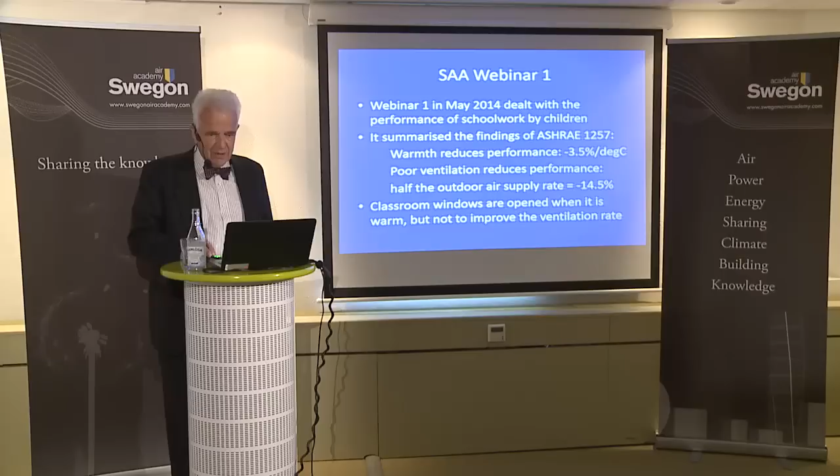Webinar 2 was held in November last year. It's showing 1 here. Yes, sorry. Okay. So this is summarizing what I said about Webinar 1. Sorry about that. I'm looking at the wrong screen here. Webinar 2, I'd better do what I usually do and turn and face the screen.

In November 2014, it dealt with thermal and air quality effects on office work, that is, adults trying to work under different conditions. The work rate was 8% lower at 27 degrees, when they thought it was only slightly warm, versus 20 degrees when they thought it was cool, if they were clothed for 25.

We showed that bioeffluents and emissions reduce work rate, in other words, air quality, and that when the humidity is below 20%, as it often is in these latitudes in Stockholm when it's winter outside, this affects the eyes, makes them feel dry, makes you blink more often, and therefore also reduces work rate very considerably.

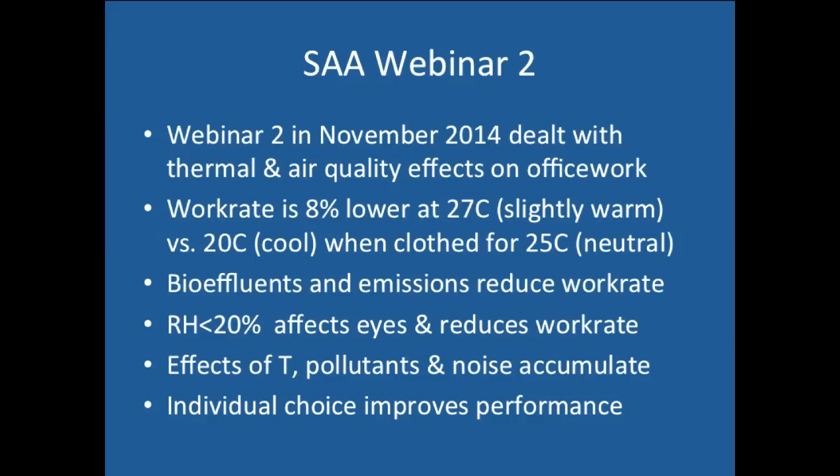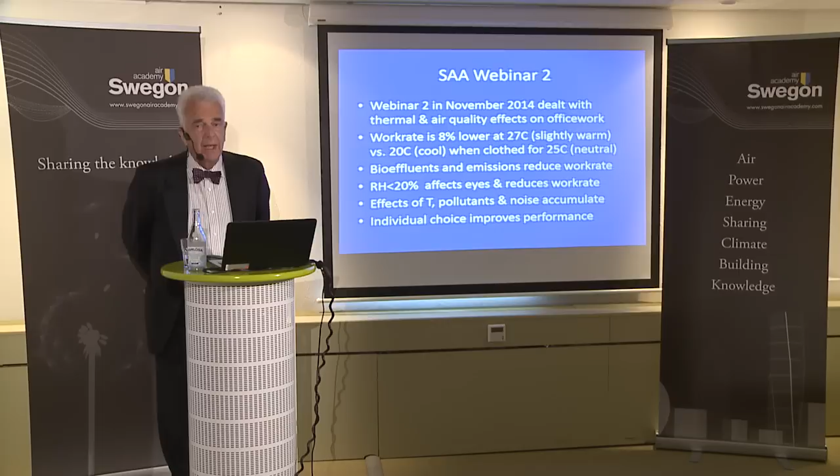We showed in another experiment that the effects of temperature, pollutants and noise can add up, not exactly, but they do accumulate. They're not additive in the sense that if you have the same effect of temperature and pollutants, you can add them together, but they will be greater if you add the second stressor. And we also showed that individual choice about some aspect of the environment can improve performance.

Well, today, in webinar 3, I'm going to tell you about 11 other experiments that I performed over the years on how other factors affect our performance. I'm very fortunate to have had the chance to study factors which you wouldn't think were part of the everyday life of an indoor climate researcher, but people saw that I could show the effects of small changes in temperature and air quality, and they asked me if I couldn't study other aspects of the daily environment.

So Swegon thought it might be interesting to make you aware of those experiments too. We have recently shown for the first time that bedroom ventilation rate affects sleep quality, and that as a result of the poor sleep, it affects next day performance. That starts being interesting for our everyday habits.

I showed over a course of many years, both with Swedish and Chinese children, that breakfast affects performance during the course of the morning, and in a big experiment that lunch affects afternoon performance.

And then during the years I was a consultant to the Volvo Car Corporation, I got the chance to do an experiment on active safety rather than passive. Instead of protecting people from the results of a mistake, failing to see something in front of them, and improving the car's ability to protect you in those last milliseconds, I persuaded Volvo that we should actually improve the vehicle climate, the cabin climate in the vehicle, to improve driver vigilance so they wouldn't make those mistakes.

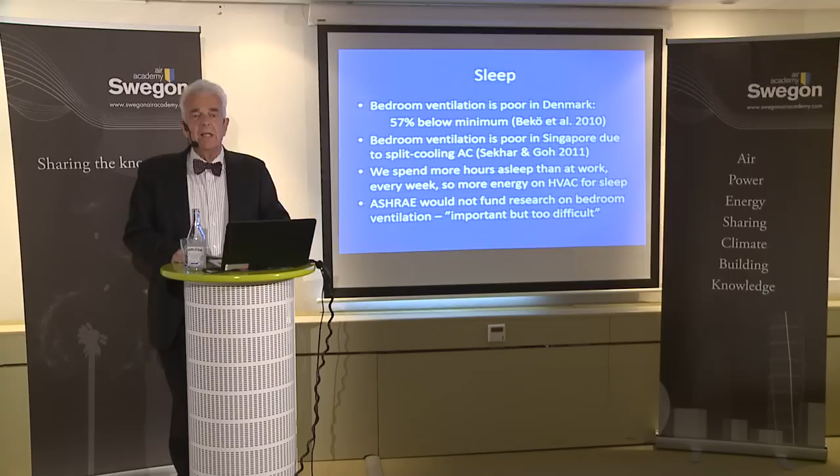I think we should study real sleep in people's own beds and under normal conditions, and that's what I wanted to do. ASHRAE said it's too complicated. There are too many things that affect sleep. Well, that's true. But sleep is a behavior, just as work is a behavior, and I know how to study behavior and how the outdoor environment or the indoor environment affects behavior. And we have methods that have been developed for looking at the side effects of medication, which allow us to do this important work.

In Denmark, we managed to get a modest grant for my colleague Peter Strøm-Tejsen to do a postdoctoral study on sleep to show that it was possible. Unfortunately, the money wasn't sufficient to do a sufficiently large experiment, and I didn't expect it to succeed in showing actually statistically significant results. But the good news is that it did.

In 2 field intervention experiments on bedroom ventilation, we studied sleep and next day performance. Sleep was recorded using actimeters that can distinguish sleep from waking. An actimeter is about this size. It's like a wristwatch. It records every movement of the body. And over a period of 3 weeks, you can then hitch it up to a computer and using validated software, find out at what point and for how long that person was asleep. In other words, not moving.

And if people are even only slightly awake, they move because they're aware of discomfort here or there, or they get a bit stiff where they're lying in bed. So we can actually quite reliably distinguish between sleeping and waking state. We can't, of course, look at sleep stages, but the distinction between sleeping and waking is important for seeing what is preventing you from sleeping.

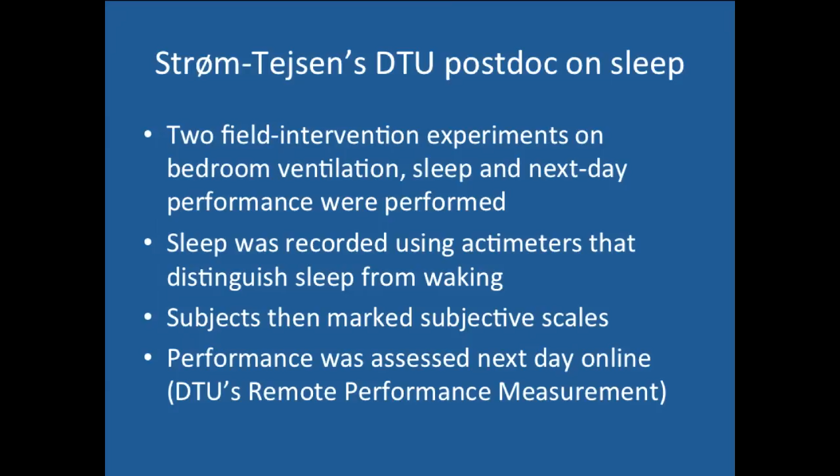And we were able to assess performance for these subjects next day using our RPM software, Remote Performance Measurement, which we developed at the International Centre for Indoor Environment and Energy, where almost all of our tests that we used to use paper and pencil for are now online. And we can measure both speed and errors on a whole range of different tasks, normal everyday tasks like typing or adding things up or multiplying them or reading or proofreading or finding errors in a text or checking columns of numbers.

All that can be done automatically, and what's more important, it can be assessed automatically so that each week of experiment doesn't generate a year of analysis. The results are available instantly.

So using these 2 quite recently developed methods, sleep studies using actimeters and RPM for performance, sleep experiment 1 was performed on 7 male and 7 female subjects over a period of 2 weeks in 14 identical student rooms, each of them single occupancy rooms. Each student was sleeping in an identical student room with the same furnishings and so on, and in their own bed. They were used to sleeping there. They were not in a sleep laboratory. They didn't have any electrodes in their heads, and we weren't taking blood.

The intervention was to open the window on one week and close it for the other, of course in balanced order. Half of them met open window first and half of them met closed window first, in our usual way for intervention experiments. A heater thermostat kept the room temperature at the setting preferred by each subject. So we weren't asking them to put up with a very cold room just because we wanted them to open the window. They chose temperatures in the range 16 to 28. There's a surprisingly large difference in what temperature people prefer to sleep at. So I wouldn't, at this stage, claim to know what is the best sleeping temperature, but of course we could do the experiments to find out.

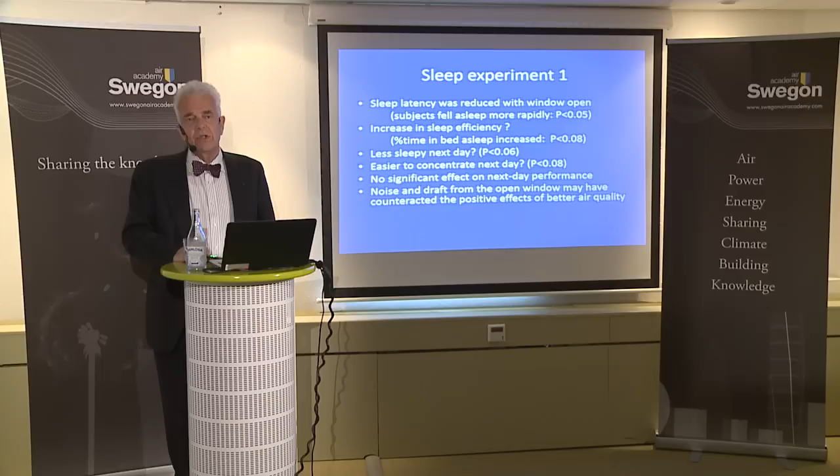Sleep latency, the time it took these students to fall asleep, was reduced with the window open. Subjects fell asleep more rapidly, and this was a statistically significant effect, even on such a small, diverse group of different gender and different background, and just 7 people of each gender. So I was actually amazed that we could show this effect.

Sleep efficiency tended to be increased, but we couldn't show that was statistically significant. The p-value, the probability that this observation could have occurred by chance, was 0.08, and so that's not formally significant. But taken together with the second experiment, we know that it was a real effect.

We asked them, of course, how they felt the next day, and with the window open, they felt less sleepy next day, p-value 0.06. They found it easier to concentrate next day, p-value 0.08. Neither of those are formally significant, but they are a strong indication that that's what was happening.

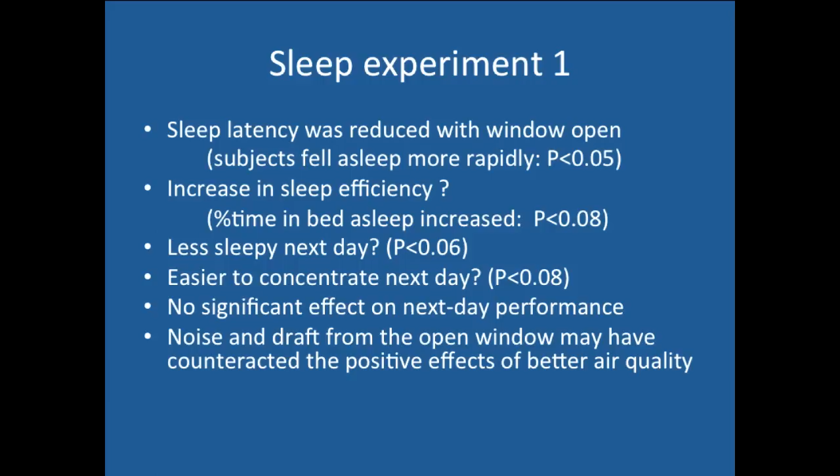We could not show an effect on next day performance in this experiment. And I think the reason is that noise and draft from the open window may have counteracted the positive effects of better air quality. And that was the reason we did experiment number 2 in a slightly different way.

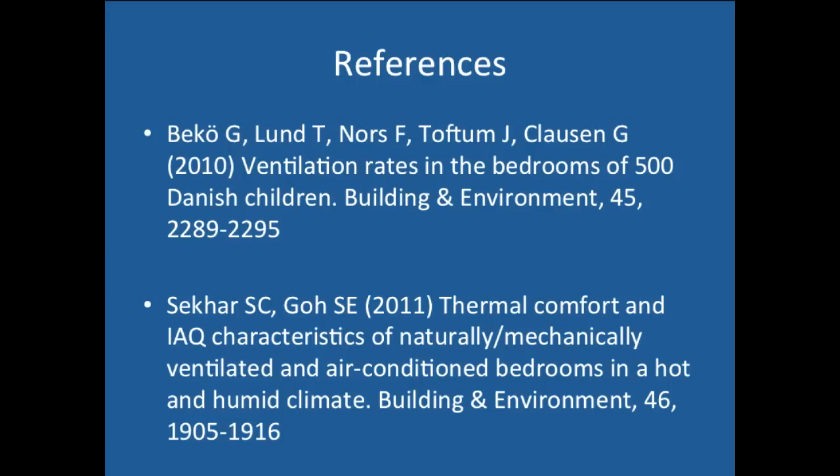This first experiment was published with this reference, and I'm not going to dwell on these reference slides because you can always go back and look at them. I've given you the references of the work documenting conditions in Danish and Singaporean bedrooms as well. So you can pick these off the slide offline by returning to this presentation at the Swegon website.

Sleep experiment 2, still with only an inadequate number of subjects, in this case 8 male and 8 female subjects, still for only 2 weeks, this time 16 identical student rooms on the same corridor, and same building anyway. There was extract ventilation in the corridor and an air inlet in the wall.

So the idea was that the air should be drawn into each room and then under the door out into the corridor. It's a very common, cheap solution, and it prevents cigarette smoke from the corridor getting into the rooms because the air is going the other way, for example. But as you'll see, it's not a particularly efficient way of ensuring good bedroom air quality. There can be short-circuiting. If somebody's door is open, then the resistance for airflow of all the rooms with closed doors will be too great for very much air to be pulled through it.

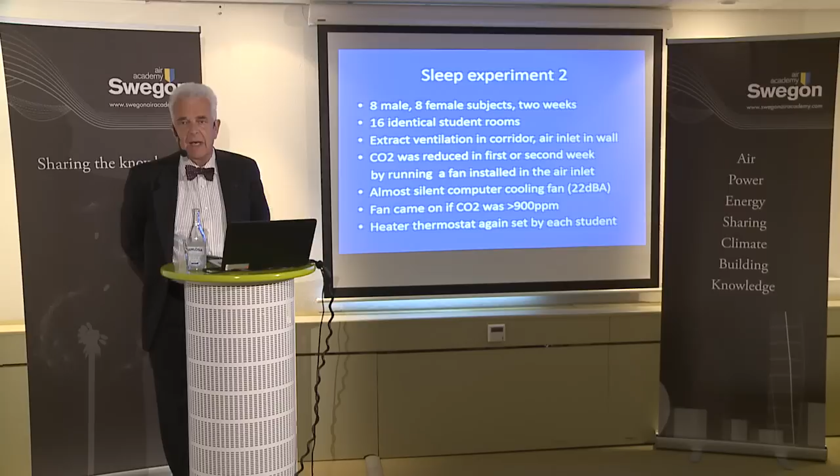We reduced the CO2 in the first or the second week, again in balanced order, by running a small fan installed in the air inlet. Peter chose an almost silent computer cooling fan, which was measured at only 22 decibels. That is not audible above normal background noise in bedrooms of 35. The fan came on if the CO2 rose above 900 ppm. Otherwise, it didn't. And the heater thermostat was again set by each student to the temperature they preferred.

The average room temperature this time was 21.9. Operating the inlet fan did not change the room temperature. There was no difference between the two conditions of air quality. The room temperatures selected this time ranged from 14 to 28, more or less as in the first experiment. And again, women selected a 3 degrees Celsius higher room temperature than men, so that seems to be fairly common. The average humidity was again 40% with the fan operating, 52% in the week with no fan. So it's highly comparable with the first experiment.

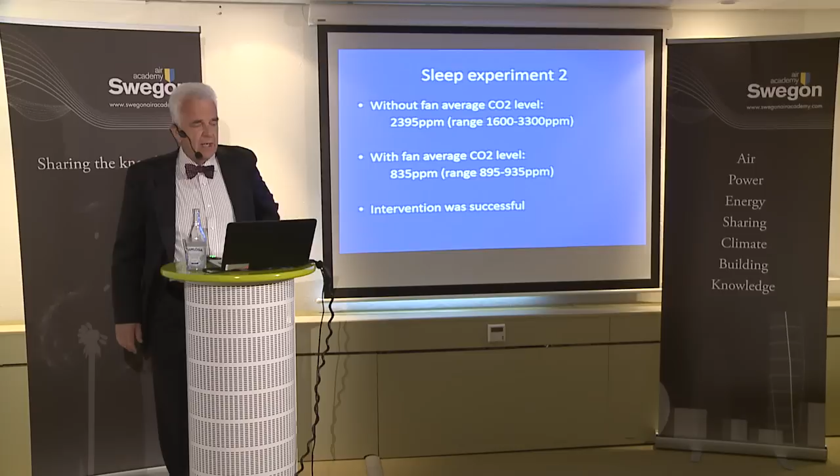Without the fan, in other words, under the normal conditions with air being pulled through the air vent by the corridor fan, the CO2 level rose during the night to 2,395 ppm, a range of 1,600 to 3,300 ppm. So poor ventilation in this student bedroom block.

And with this tiny fan operating at an absolutely negligible energy cost, the CO2 level was dropped to 835. Again, a fourfold decrease in the CO2 level. And the range was 895 to 935, so there were no peak values above 1,000 ppm, which is what is conventionally taken to be indicating poor ventilation.

In other words, again, the intervention was successful. We made the change we intended to in indoor air quality in these 16 bedrooms. The results showed that the sleep efficiency was higher this time with the fan, more time in bed asleep. This time it was formally significant. The p-value was below 0.05.

With the fan running, with the CO2 controlled, subjects reported feeling significantly better and feeling more rested. So these were significant changes in how they felt the next morning as a result of our change in ventilation. Now those three findings would in themselves motivate such a tiny investment in better bedroom ventilation, and I hope they will. But we went on to measure their performance too.

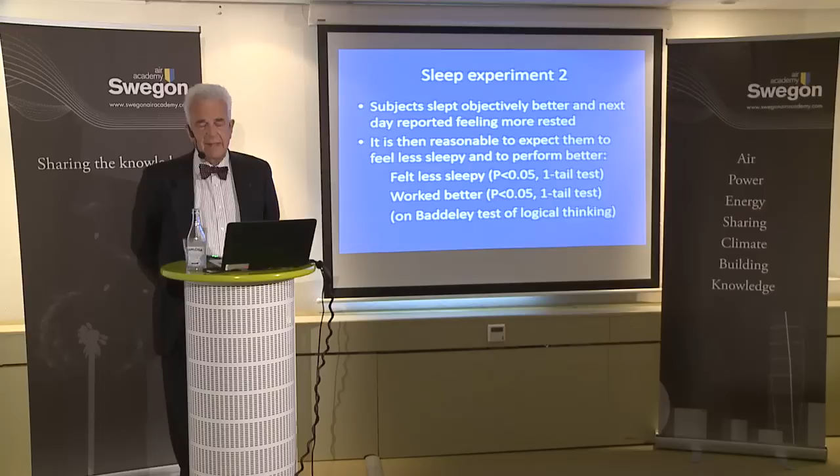The test that we used was Baddeley's test of logical thinking. It's been used a lot to show, for example, that doctors who've worked all night should not deal with patients next morning because they are not able to do as well on this test of logical thinking. So if you have a responsible job or if you really are interested in your job, you should make sure that your bedroom is properly ventilated so that you can think straight next day.

You'll also feel better. Sleep experiment 2 was communicated in Brazil last October. We haven't yet published a full scientific paper on these two experiments, but we will. I'm now going to move from sleep because, unfortunately, through no fault of mine, we're only at the start of this work. As I said, I wasn't able to get the money for doing major work on bedroom ventilation.

But I was invited to do a lot of experiments on breakfast and performance. Firstly by a dairy who wanted to presumably sell more milk products for people to eat at breakfast. Then by other food companies who wanted to get in on the act. And finally by the Kellogg Foundation, who funds this kind of work internationally.

I'm going to tell you about a whole series of experiments where I manipulated breakfast experimentally for 81 Swedish children in 4 classes of a Gävle school while I was working there at the time. Later, in 10 classes, 166 Swedish children, in 2 classes in each of 5 schools in another Swedish town called Linköping, and with my colleagues in 3 Chinese research institutes, 515 Chinese children, 12 classes, in Guangzhou, Shanghai and Beijing.

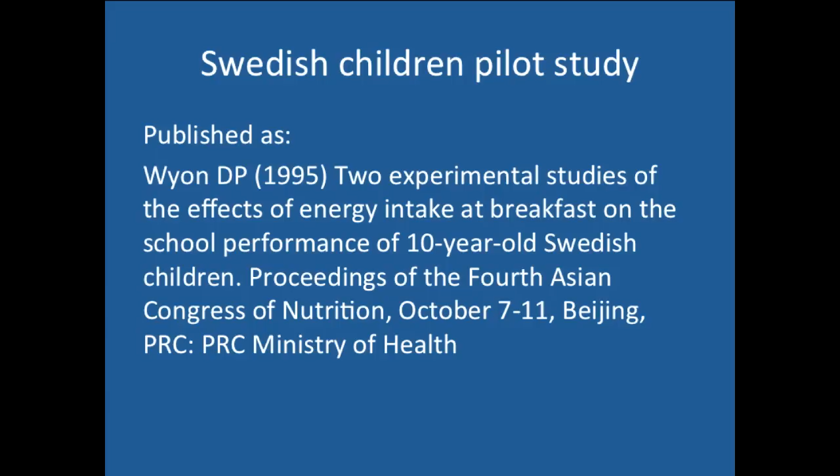And this was published, well, presented, if you like, at the Fourth Asian Congress of Nutrition, which is how I got into contact with Chinese researchers who were also asking themselves the same questions. This conference paper is probably difficult to get hold of, but it does exist. Swedish children pilot study, we call this, because the nutritional journals would not accept this study for publication, because the nutritional intake had been subjectively reported and not measured. And nutritional experts like to know exactly what they're talking about.

For me, as a behavioral researcher, the intervention was asking the parents to do one thing or the other on given days. And if there was a statistically significant difference, well, then breakfast has an effect. But they wanted to know which breakfast, how much protein, all those things that nutritional experts are paid to concern themselves with. So we had to redo the experiment.

Arla, who had paid for this first experiment, is a major dairy company in Sweden and neighboring countries, and they publicized the findings anyway. They, in fact, took the unusual step of publishing my experiment with my name and everything on their milk packages. Millions and millions of milk packages. So just about every household in Sweden got to know about the results of this experiment. And as a result, Swedish parents and children started to regard breakfast as important for schoolwork.

In fact, I got many messages from parents who said that this was a real nuisance, because one parent said, I got up early, I put out everything to be a really good breakfast and expected my 14-year-old to be delighted. And when she came down, she took a look at the table and she said, where's the apple? And that was because we were showing pictures of a good breakfast, and this happened to have an apple in it. So it did lead people to be aware of the need and the benefits of eating a good breakfast.

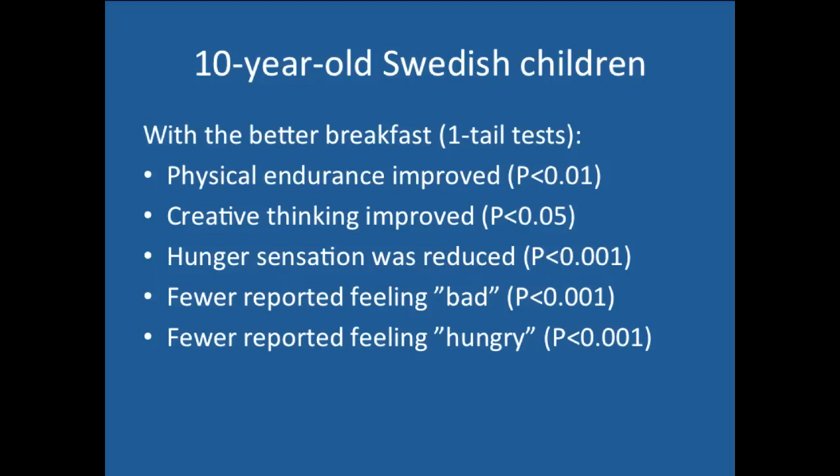With the better breakfast, again using one-tail tests, because this was our expectation, physical endurance again improved on the same test, p-value of 0.01, very highly significant effect. Creative thinking again improved, p less than 0.05. Children reported less hunger, p less than 0.001, and fewer reported feeling bad and fewer reported feeling hungry after eating the good breakfast. So that's quite a lot to get for a few pieces of breakfast cereals and milk, a few items.

As I said, we weighed the uneaten food to determine the intake. And on the day with the poor breakfast, the errors decreased the more they ate. Because even with the poor breakfast, they were all having less than 10%. The more they ate, the better they did on the addition test. So there, of course, we're on a very steep curve. And so we are getting close to predicting what would happen if they hadn't eaten any. There was a correlation between how much of the bad breakfast they ate and how well they did on the addition test. So every little helps at the low end. The idea of giving children from a deprived home a sandwich when they come to school probably has an enormous effect on their ability to do school work.

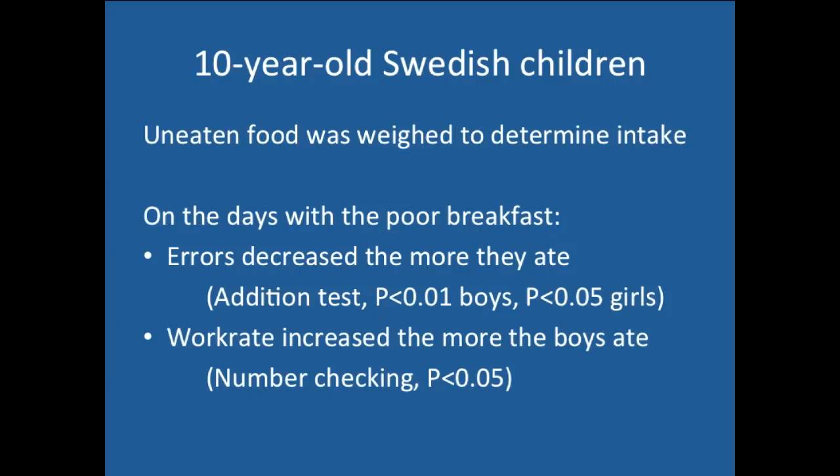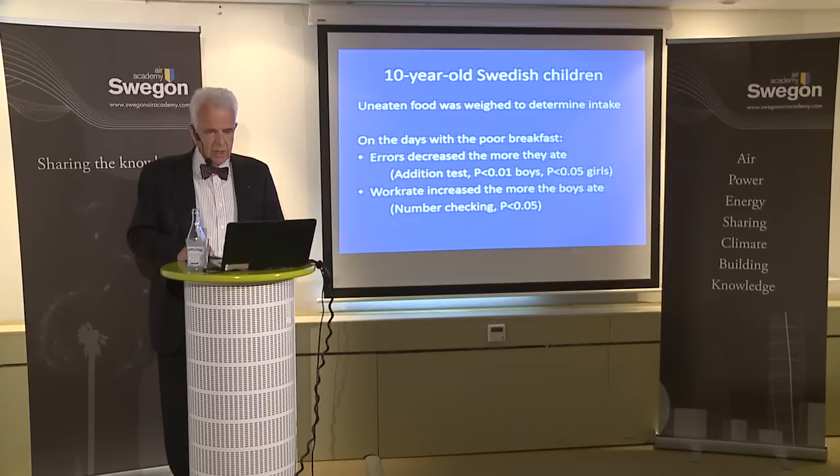The work rate increased the more the boys ate. They worked faster if they had eaten more of the bad breakfast. But remember, this is only on half of the data, because here on this slide we're talking about the days when they had had a poor breakfast. There's a lot of data in this, and I'm very pleased that these results were so significant. And this time our paper was accepted by a reputable nutritional journal, the International Journal of Food Sciences and Nutrition. So that is an archival journal, and this paper is readily available.

After my presentation of the first experiment in Beijing, I was approached by 3 research institutions in China with the help of the Kellogg Foundation that was helping them to do this kind of research. Would I advise them on how to carry out this kind of experiment? So I made a lot of trips to China to do just that. The fact is that Chinese children apparently rarely eat any breakfast. It's just not the national habit to eat much breakfast, just as it isn't in France, or wasn't. You know, the traditional croissant and a Gauloise is a poor breakfast, and Chinese children eat apparently something like that.

So we gave them breakfast A in these experiments, which was again more than 20% of recommended daily allowance, consisting of cereal, milk, bread with peanut butter, which they like, and breakfast B, less than 10%. In this case, they just got some congee, which is a rice gruel, which most of us outside of an old folks' home wouldn't like, and a steamed bun. And this provides a fair amount of calories, but still less than 10%, and almost no protein at all.

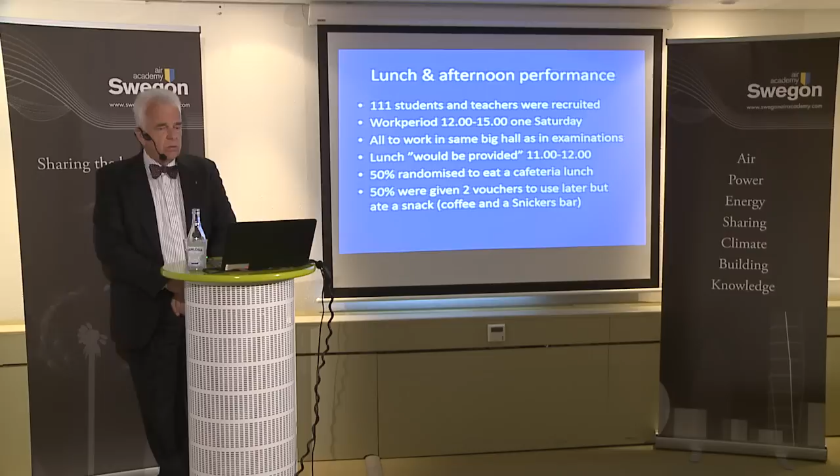But I'm afraid these results were never published. I wasn't paid to publish them, and I didn't have time. I was doing other things. But I was paid to look at the effects of lunch and afternoon performance. I recruited 111 students and teachers from a provincial high school, or shall we say technical school, in Sweden, to be at a particular venue between 11 and 12 o'clock.

This is the only time I've done an experiment all in the same day, all in the course of 4 hours. It was bang, and it was done, and Securicor was there with the money, and we paid out huge amounts to these people for being there for those 4 hours. They were all to work in the same big hall at an individual desk as in an examination. They were used to that. They were students and teachers. And we said in the recruitment literature that lunch would be provided between 11 and 12.

We randomized 50% of those turning up to eat a cafeteria lunch. And the other 50% were told that they would be receiving 2 vouchers that they could use later, all at once or on 2 different days. But today they were not to have lunch, to eat a snack, fairly substantial snack, a coffee and a Snickers bar, which is what many people think is an adequate substitute for a decent lunch.

The nutritional values of the lunch we provided were 633 kilocalories, 34 grams of protein and 15 grams of fat. It was in fact spaghetti bolognese, salad, coarse bread and medium fat milk. The snack, surprisingly to me, provided 300 kilocalories, 8 grams of protein and 13 grams of fat. We should probably have provided a cheaper kind of sweet, because this almost wrecked the experiment, because it was half as much nutrition as in the good lunch.

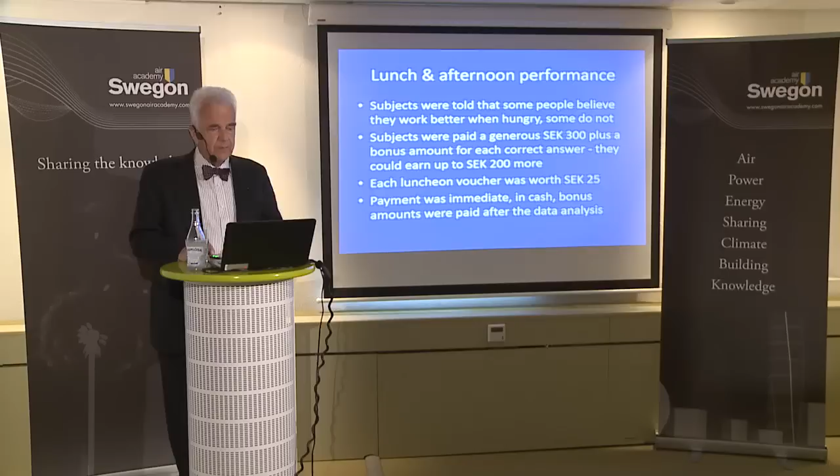So we expected there to be no effect or even a negative effect in the period immediately following lunch compared to people eating a snack. I think that's what many people think when they like to keep going and just eat lightly and try and force through the afternoon. The subjects were told that some people believe they work better when hungry and some don't, so that the level of motivation would not be too badly affected.

The subjects were paid a generous 300 Swedish crowns plus a bonus amount for each correct answer. So they could earn up to 200 crowns more, and 500 tax-free for an afternoon like that is pretty good for students. And each luncheon voucher that the ones with the snack were given was worth a further 25 Swedish crowns at that time. The payment was immediate in cash, and the bonus amounts were sent to them after the data analysis had been performed.

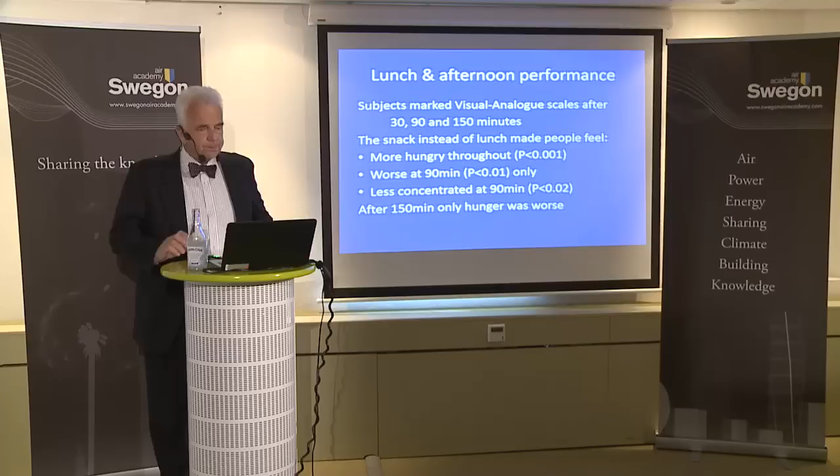Subjects marked visual analog scales after 30, 90 and 150 minutes. In other words, half an hour afterwards, a further hour and a further hour again into the afternoon work session. And the snack, as opposed to lunch, made people feel more hungry throughout. That was a significant difference. It made them feel worse at 90 minutes, but not at 30 and not at 150 minutes. And at 90 minutes, they also said that they had more difficulty concentrating. But after 150 minutes, only the hunger was worse.

It looked like this on the visual analog scales. This is a scale on the left-hand side that runs from 0 to 100. 0 corresponds to very hungry and 100 to very full. And you can see that the people who ate lunch were right up there, pretty full, 90 or something like that. And that their line trended down very slowly over the 150 minutes. Whereas those who'd eaten the snack, they started off above the halfway mark of hunger, crossed over just before the 90-minute period, and then moved down towards being very hungry during the afternoon.

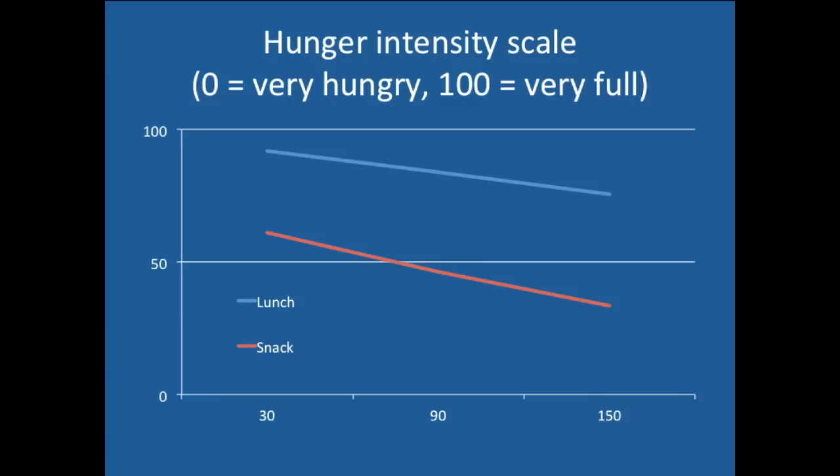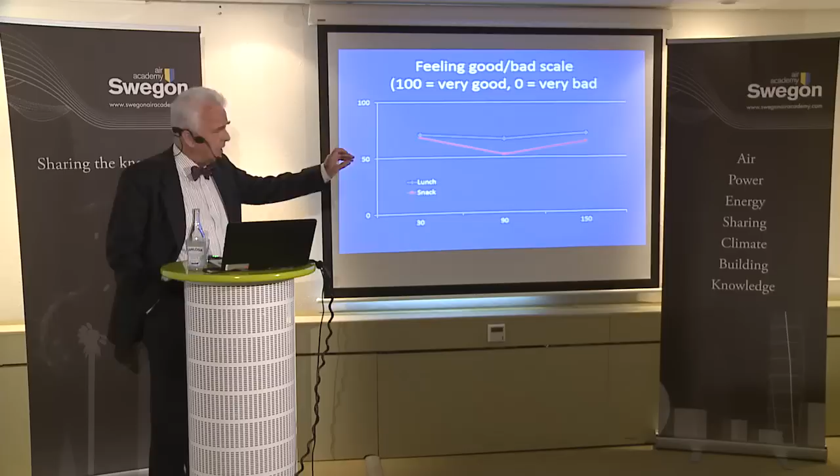So the body then mobilized reserves, and after 150 minutes, they felt just as good as if they had eaten lunch. But they still felt hungry, okay? Because on the previous scale there, they were well below the lunch group, well below down there in the hungry side. But they felt good, as you can see in the upper half of this scale. All subjects remained in the feeling good half of the scale all afternoon, though they felt worse at 90 after a snack than after lunch.

And after a snack, subjects crossed into the hungry half of the scale after 1 hour and 16 minutes. So eating a snack like that will keep you from being hungry only for 1 hour and 16 minutes. After that, it's been metabolized and you start feeling hungry again. And that's why if you persist in this behavior of eating unsuitable food, you will feel hungry much more often and end up eating many more calories and putting on weight.

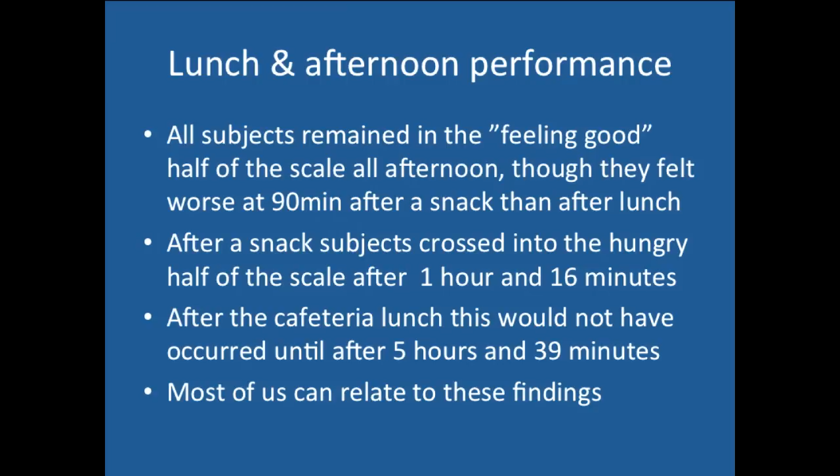After the cafeteria lunch, this would not have occurred until after 5 hours and 39 minutes. So a simple meal like that, single course, was sufficient to keep you from being hungry for 5 hours and 39 minutes. So you could work in the not hungry part of the scale for that length of time. And most of us, I think, can relate to these findings on the occasions when we have omitted a meal or had a good meal and gone on working in the afternoon.

So remember that we thought people might work less well to begin with. It was expected that a snack would maintain performance for 30 to 60 minutes. It was also expected that a good lunch might actually decrease performance at first. But the really striking thing about this experiment, and I haven't time to show you all the detail, was that those eating a cafeteria lunch instead of a snack always worked better than those eating a snack. That is, both initially and throughout the rest of the afternoon.

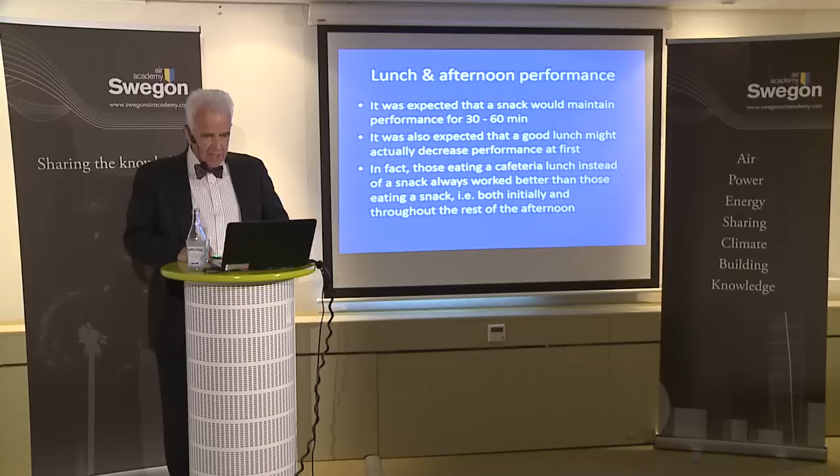Even though there wasn't all that much difference in the calories, there were different sorts of calories, they were quickly metabolized, and people who had eaten a simple meal ended up working better all afternoon than those who had tried to skip the meal by eating candy. This report is published with all the detail in a report to the Swedish Agricultural Research Institute.

Finally, I'm going to move on to the last part of this webinar, the work I did for Volvo on active safety engineering. I've called it heat and driver vigilance. Volvo is known for its passive safety engineering. Everybody thinks of Volvo as a safe car to drive in because they were the first to introduce 3-point seatbelts. And they have put in a huge amount of really good work on crumple zones and different ways of airbags and so on, different ways of protecting you after you've made a mistake.

But remember that impacts occur when drivers have made mistakes of either observation or judgment. I mean, you can always avoid an accident by not driving that day or by driving more slowly that day. So the fact that you had an accident and hit something shows that you made an error of judgment, or somebody else did, or else you made an error of observation.

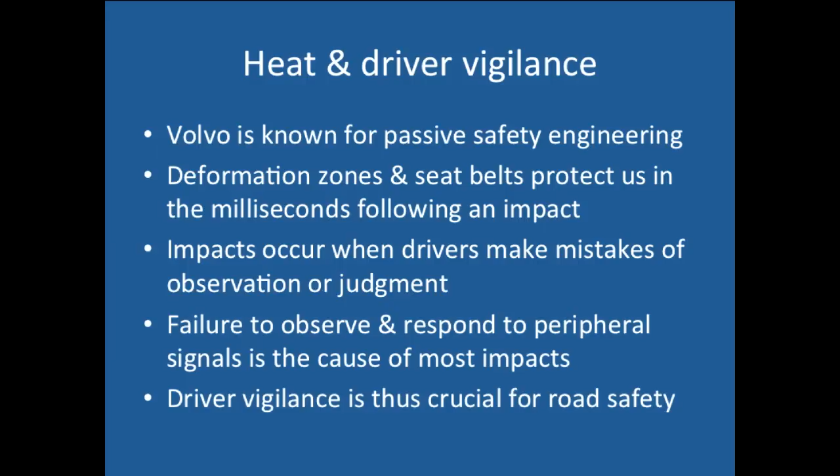Failure to observe and respond to peripheral signals is the cause of most impacts. So driver vigilance is crucial for road safety. So anything we can do with the engineering to improve driver vigilance is going to improve road safety. And just how much, I am in a position to show you today.

Most studies of driver vigilance are really tests of response time. They show a pedestrian jumps in front of the car, or an elk in a typical Swedish test. How quickly can you brake? These stimuli are clear and they are expected. So I don't call that a test of vigilance, I call it a test of response time.

That's appropriate for a Formula One driver. It's not appropriate for a housewife going about her business in a suburb where anything can happen. There are no elks or pedestrians on a Formula One track, but there may be in the suburbs. Driver vigilance, as I define it, includes detecting signals that are initially peripheral and unclear.

You have to see them, you have to interpret them, you have to think about them, you have to act according to the probability that they indicate something is going to happen. And drivers must distribute their attention optimally to detect such signals. Distribution of attention is critical to road safety.

You can't concentrate on one thing just like Formula One drivers do. They concentrate on avoiding other cars and getting around the corner without spinning out. That's not driving, that's Formula One driving. Normal driving is getting from A to B without hitting anything and preferably enjoying it and doing something useful. But your distribution of attention during that activity is absolutely critical for road safety.

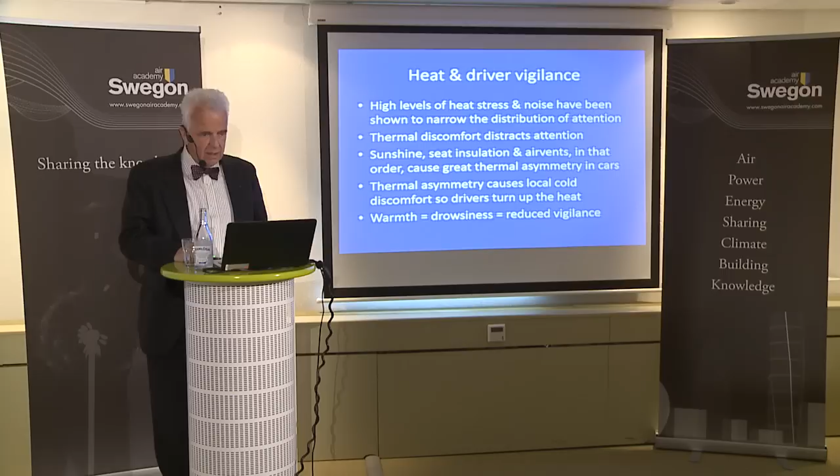Now, heat and driver vigilance has, of course, been a topic of interest for the military. High levels of heat stress and noise, and I really mean high, where you're on the verge of collapse, and noise where you are at imminent risk of hearing damage, above 110 decibels. These two stress levels have been shown to narrow the distribution of attention. You can't think about anything else except what you're supposed to be doing. Aiming a gun or looking at a radar screen or whatever it is in these military experiments.

Now, thermal discomfort in itself distracts attention, so it will distort your attentional field. If you feel you're sweating in your back, if you feel that the vents are blowing on your chest too much, you're going to get a stomach ache or a cramp. That distracts your attention from what you should be paying attention to, what's happening inside the car and outside it.

And I've done a lot of experiments developing better ventilation in cars. And I know that sunshine, seat insulation and air vents, in that order, cause enormous thermal asymmetry in cars, greater than you'll ever meet in any other situation. And thermal asymmetry causes local cold discomfort. So drivers turn up the heat to avoid feeling too cold on some parts of the body.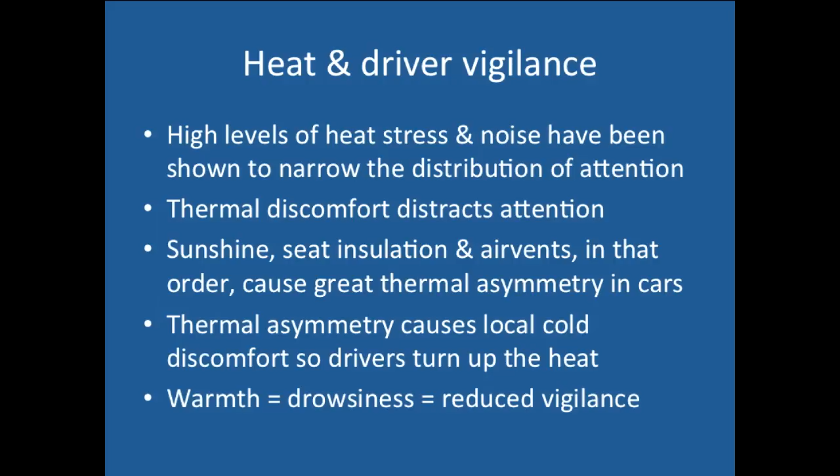And warmth gives drowsiness, which leads to reduced vigilance. And these are the mechanisms that are happening in cars all the time. Distraction of attention and thermal asymmetry, causing people to drive around in vehicles that are slightly too warm. Thermal manikins have allowed Volvo to optimize the thermal environments in their vehicles, trucks, buses, cars.

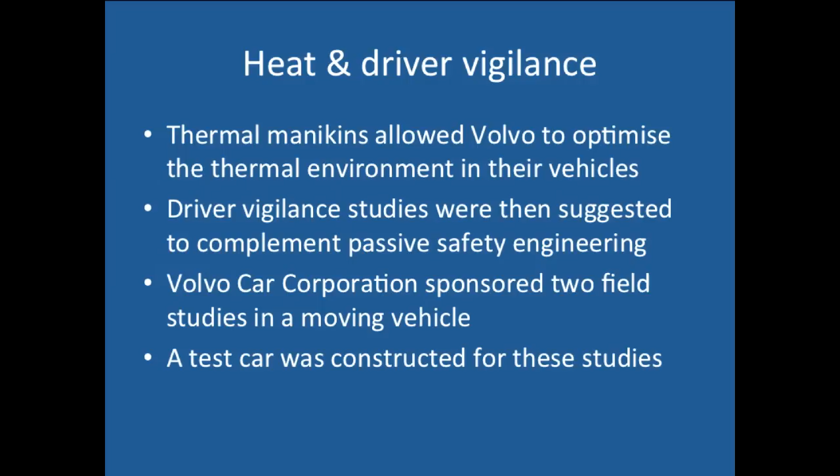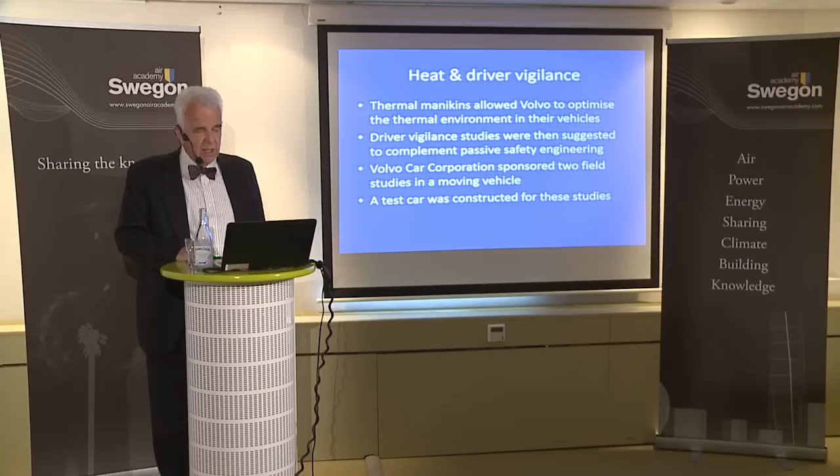And driver vigilance studies were then suggested to complement passive safety engineering. And the Volvo Car Corporation, to their credit, sponsored 2 field studies in a moving vehicle, which I performed for them. And they made a test car for me for these studies. Remember, this was all done before computers had been invented. So the experiment was run by a Hewlett-Packard desk calculator, a standby we had in those days, about the only kind of instrument we could program to do anything at all.

In this experiment, 21 possible signals could occur at random. All of them were such that drivers should respond. For example, signal lights saying your brakes are failing, or that the engine's stopped or something. Instrument error, in other words, your instruments are showing something that's wrong, the tank's empty when it isn't, the speed is high when it's not, and so on. Motor or wheel vibration, which you should be aware of, so that you can pull over before the wheel comes off, or the engine drops out.

Unintended operation of wipers, blinkers and horn, and a blue flash in one of 3 rear view mirrors. You should be aware of that, of course. So firstly, so you can pull over, but also to avoid getting fined for whatever it is you're doing. Drivers pressed a foot pedal with their left foot. It was an automatic car, so their left foot was available to me. They pressed a specially installed foot pedal which allowed us to time their response to the signal, and then they reported verbally into a microphone what they thought they had seen.

And this account was evaluated later, so that either they did see it or they saw something else and missed the signal. But in any case, we had their response time and the number of errors that they made in detection, either failing to see the signal or recognizing it incorrectly.

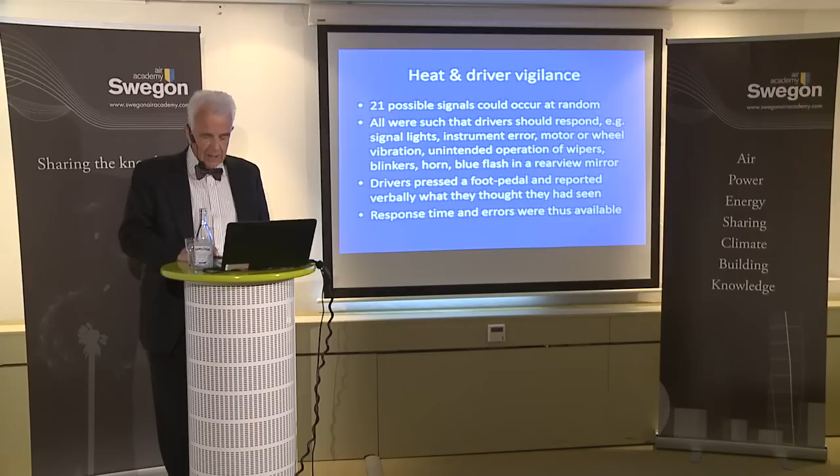Now, there were two conditions. When they got into the car, it was either at 21 degrees or at 27. We actually alternated between those two temperatures for successive subjects. And since those subjects made their appointments when they were available for the experiment, it was completely random which one they happened to meet. It would have been changed if another subject had been inserted just before them, then they would have had the other one. So there truly was a 50% chance that they would be exposed for 1 hour to 21 degrees or 27.

Just a word about those temperatures. They're both in the thermal comfort range for sitting down driving. 21 is what you would probably set if you had air conditioning in the vehicle. 27 is what you would have to put up with if you didn't have air conditioning in the vehicle under the outdoor conditions where we did the experiment. Springtime sunshine, fairly cool out, but the car still gets warm because of the sun.

Each subject drove for 1 hour. They made 4 circuits of a route that they were shown on a map and told about verbally. On the first time round, the experimenter in the back seat prompted them to turn at the right point, and it was both urban and rural. Into town, through town, 7 traffic lights, out of town, round on a ring road, back in on the same circuit. The observer noted route-finding errors during the second, third, and fourth circuit.

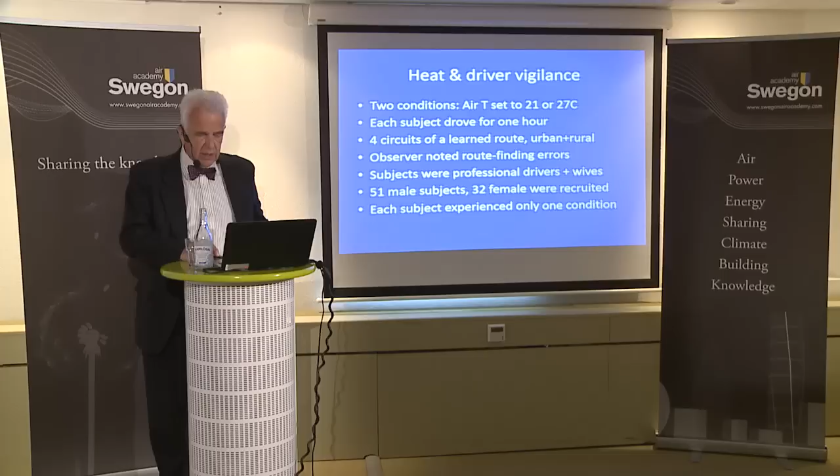Now, over the whole 60-minute period of driving, 50% more signals were missed in the warm car at 27. This was a highly significant effect. The reaction time to the signals they did see increased by 22% in the warm car compared to the cool car. In the second 30 minutes, 92% more signals were missed at 27 degrees. And that was significant at the p.01 level. And reaction time increased by 30% in the warm car compared to the cool car.

Now, those are huge changes, and they are highly significant. They cannot have occurred by chance. And this was only 1 hour. Professional drivers are expected to drive for 11 hours. And think how sensitive to temperature they are likely to be when they're tired, as well as warm.

At speeds below 60, that is in town, 75% more signals were missed in the warm car than in the cool car. So it wasn't just on the long, boring motorway bypass. It's also when you're suffering from some information overload in city traffic.

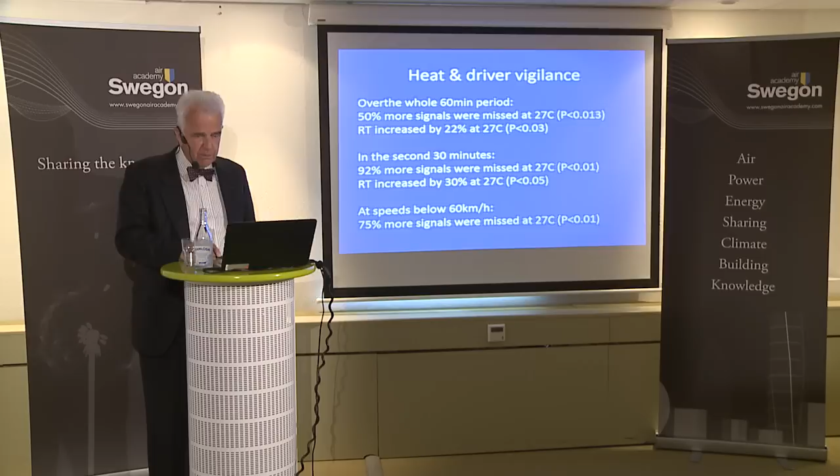7 traffic lights and lots of pedestrians crossing. Vigilance was more affected by warmth in the second half hour, as we've just seen, in city traffic than on the motorway. That was an eye-opener for us. Among younger drivers, again, an eye-opener. We had expected older drivers to be more affected. And among male drivers, again, we had expected perhaps women, who often drive less than men, or they did in those days, to be more affected.

So as you're starting to get tired, you're more affected by warmth. If you're overloaded by information in city traffic, you're more affected by warmth. If you're a young driver, less experienced by definition, you are going to be more affected by warmth. And if you're male. And this is what it looks like.

Their response time to the signals they did see, and that's not all of them, was much longer in the first half hour, but not significantly so. And in the second half hour, that effect became significant.

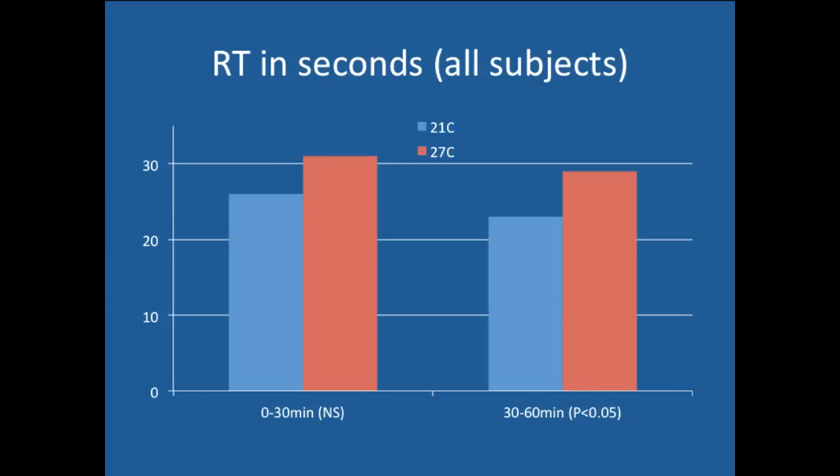At 60 kilometers per hour, a warm vehicle travels 88 meters further than one with air conditioning before a signal is detected. In other words, something's gone wrong with your car, you just go on for almost 100 meters before you even see it, before you even detect it. No, still less before you can do anything about it.

And in a warm vehicle, signals are undetected at all. We cancel them after 3 minutes. They're undetected over 3 kilometers on 50% more occasions than with air conditioning. Now, these two effects have to affect road safety.

You're driving down the road, you failed to cancel your indicator, it's showing that you're about to turn, so someone drives out in front of you and you think it's their fault. It's actually your fault because you failed to notice that little green arrow blinking on your dashboard. And I've seen that happen far more often on warm summer days than on cold days.

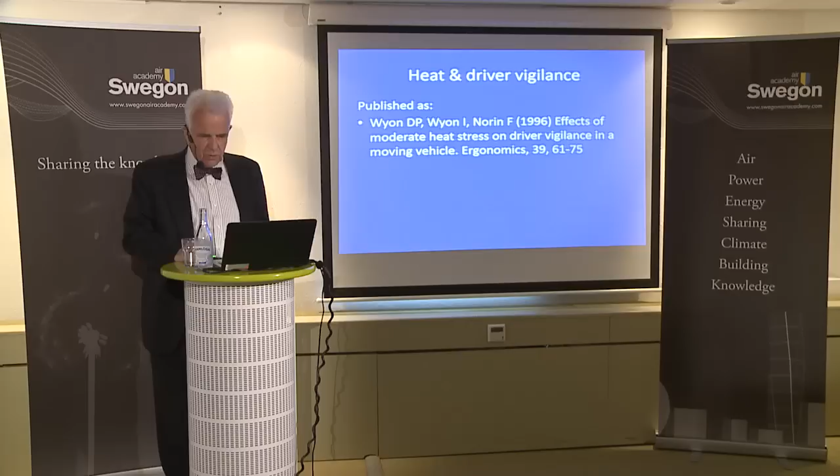This paper was published in the journal Ergonomics in 1996. That's almost 20 years ago now, and is of course available in scientific libraries. We used the same car to do a second experiment. Airborne dust, which we meet a lot of when we're driving, causes eye irritation. And eye discomfort is one more thing that distracts attention. Also, it makes you blink, and blinking slows visual data acquisition.

Although you're not aware of it, when you're blinking, there is a period when you can't see anything. The world goes black. If I did it for you with a blind in front of the driving position in the car, you'd be horrified. But in fact, you're doing it yourself every time you blink. A blind comes down, you can't see anything. The brain deals with it because it's expected. So you're not even aware of it. But you have less time to see things. You're likely to miss a very rapid signal.

So for these reasons, we expected that dust in a vehicle might affect driver vigilance. We used the same vehicle with the same approach, the same 4 circuits, part urban, part rural. This time we persisted and had 100 drivers, 53 male and 47 female. We used a rather unconventional method to remove the finer dust. We had a little black box underneath the glove pocket. If anybody saw it, they didn't mention it. Nobody could detect what it was.

It was an ionizer. It was either on or off, just as we had either 21 or 27 degrees. When it was on, it was providing 20 to 30,000 negative ions per milliliter. And when it was off, it wasn't. Charged particles adhere to surfaces, particularly the kind of surfaces we have in cars, plastic, electrostatically charged surfaces. And you've probably noticed that happening in your car. You can write your name on the dashboard because charged particles adhere to surfaces.

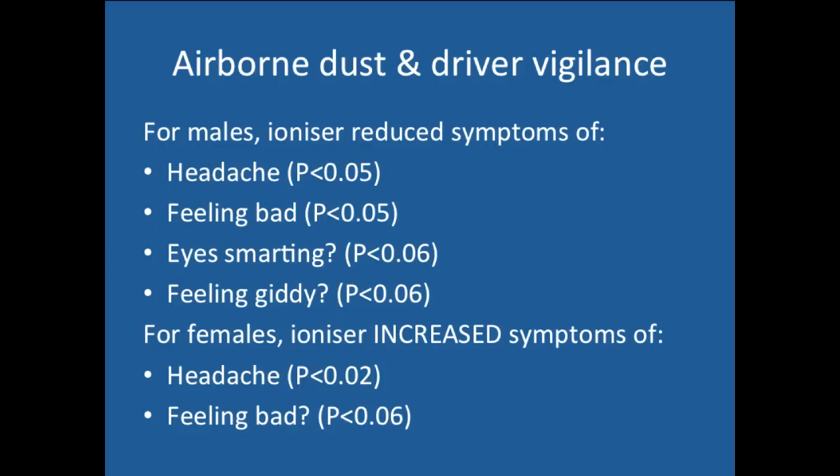For males, running the ionizer reduced symptoms of headache significantly and feeling bad. It tended to reduce the number of people who said their eyes were smarting and the amount to which they felt giddy, but those were only significant at the 0.06 level. For females, for some reason, the ionizer increased symptoms of headache and feeling bad. We still don't understand why that happened.

But looking at both genders together, for those less than 40, the ionizer reduced symptoms of the eyes feeling dry, eyes smarting, eyes aching, and eyes feeling gritty. So the intervention to prevent airborne dust from bothering your eyes succeeded. And these figures are from men and women, even though there were some other effects of ionization.

At that time, ionizing was the latest thing, and people were proposing that you should ionize instead of ventilate. That would have saved a lot of energy. But I don't personally consider it a very good idea for the reason I said. You've got to clean the surfaces, and children in daycare centers where they run ionizers go home with very black feet because the dust is adhering to the floor to a much greater extent.

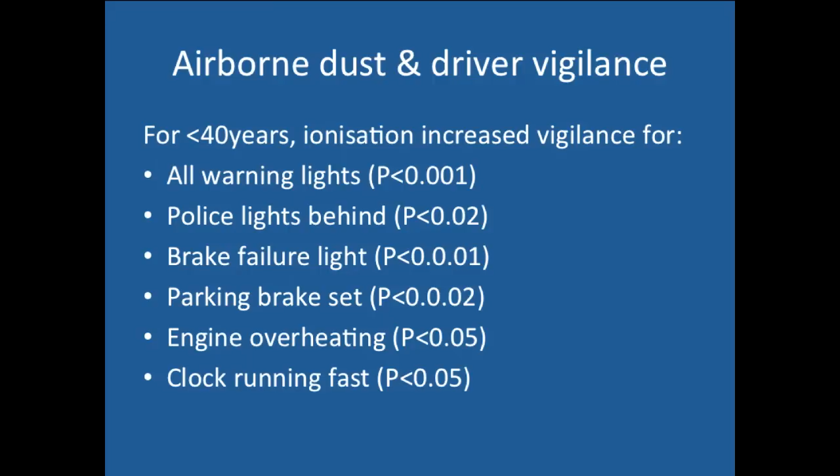Overall, ionization increased vigilance for all warning lights, generator failure, parking brake left on, and the RPM being shown too high. For those under 40, where you remember there were bigger subjective effects, ionization increased their vigilance for all warning lights, 0.001, police lights behind, brake failure light, parking brake left on, engine overheating, and clock running fast. These are all signals that could occur in the car.

Ionization effects were most marked in the second half hour when they were starting to feel tired, just as warmth effects were greater in the second half hour, for the younger subjects rather than for the older, and for female subjects. Ionization reduced vigilance for only one signal, when we showed speed below true speed, but as this is illegal, the possibility may have been discounted. We were indicating that they were only driving at 50 when in fact they were doing 70.

We interpreted the law that since somebody in the car knew it and was able to warn the driver, the experimenter in the back had an indication of true speed, that this was perfectly acceptable. And we got away with it, and I don't mind saying that this is how we did the experiment. This kind of experiment has never been done in American universities, simply because of the risk that somebody will deliberately cause an accident and then sue the university.

But the US Army contacted me after this, and they wanted to use the car to examine Gulf War syndrome, which has been said to affect veterans' ability to drive. But by then, the car had been scrapped. Volvo had attempted to give it to various research institutions, but they all felt it was beyond what they could maintain and would have been too expensive for them, so it was scrapped. And I think that's a great pity.

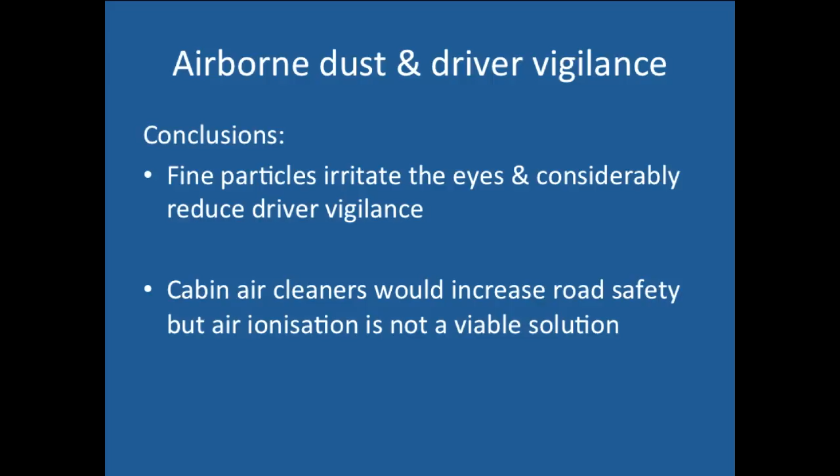Our conclusion from this experiment was that fine particles do irritate the eyes and considerably reduce driver vigilance, and that cabin air cleaners would increase road safety, just as air conditioning increases road safety. But air ionization is not a viable solution, so I don't want anybody using this presentation to sell ionizers. This was published in the journal Indoor Air in 1995 and is readily available.

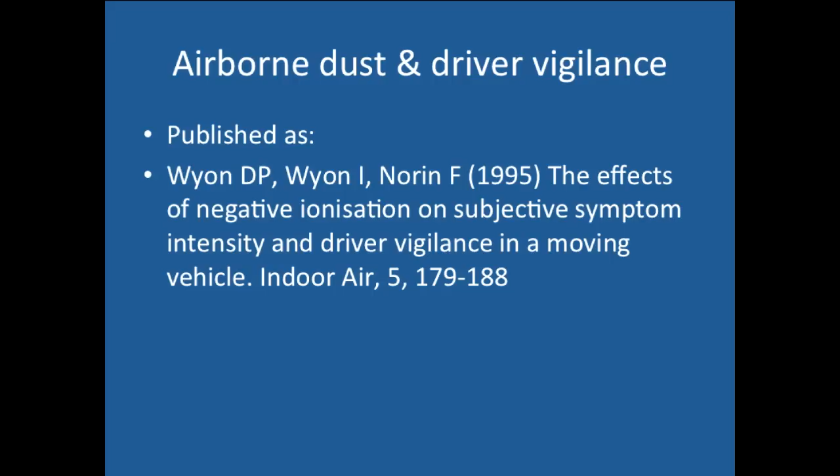That's my time. The main purpose of this lecture was to show that performance can be used as a dependent variable if experiments are properly designed, even for such odd things as breakfast, bedroom conditions, and the conditions in your car. A secondary purpose of this webinar was to demonstrate that the conditions we experience every day have quite large effects on performance. The indoor environment has a particularly large effect, and if you doubt that, review webinars 1 and 2. Thank you very much.

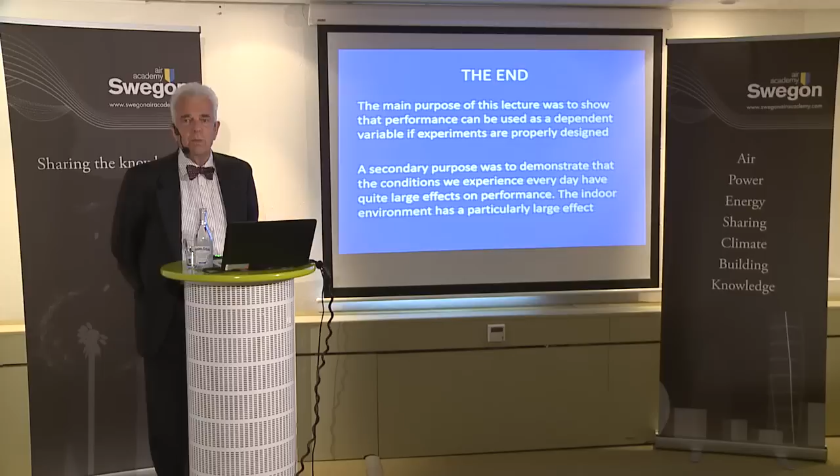So thank you, David, for a very lovely presentation, and I'm very glad that you have been able to fulfill my wish, and that was to have three webinars. The first webinar was about our children, the performance of our children, then about our performance as normal adults and human beings at the offices. And now we complete the circle with what are the other factors that are influencing our performance.